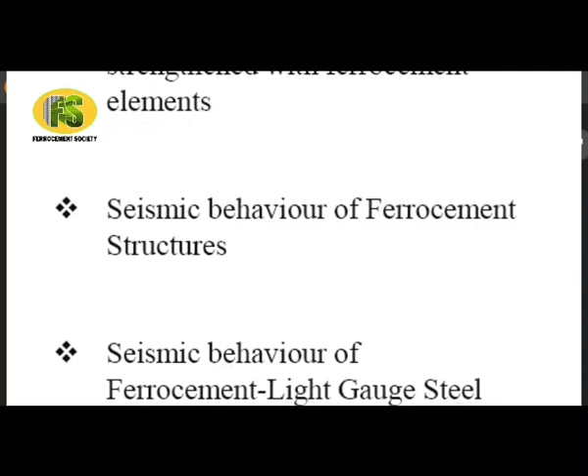Today I will talk about ferrocement and the seismic performance of structures with ferrocement elements. I will cover three aspects: seismic behavior of structures strengthened with ferrocement elements, seismic behavior of ferrocement structures, and seismic behavior of ferrocement and light gauge steel composites.

The first and third points may seem similar, but they are not. In the first point, we talk about elements that add strength, stiffness, and maybe ductility to an existing structure. In the last point, ferrocement and light gauge steel composites share equal responsibility for carrying the load, even at the working stress level and under static load.

When we study the dynamic behavior of any structure, what properties are we interested in beyond those required in statics? In statics, we mainly require stiffness and its degradation over strain level. In dynamics, the problem is more complex because we must look at mass distribution, the amount of mass the structure has, and its structural damping. These three properties are important for elastic analysis.

When we venture into the plasticity or near-failure region, we must also take into account stiffness degradation and hysteretic damping in addition to structural damping. All the studies we will discuss focus on evaluating these parameters for structures involving ferrocement.

We know that ferrocement and reinforced concrete structures behave differently under impact loading. A ferrocement structure would have widespread, closely-spaced cracks because of closely spaced reinforcements of smaller diameters, and the structure would remain intact even after a significant impact. The RCC structure, with reinforcement placed far apart, typically fails by crumbling, delamination, or more brittle failure. So ferrocement inherently has more ductility than RCC structures, which is advantageous for seismic behavior.

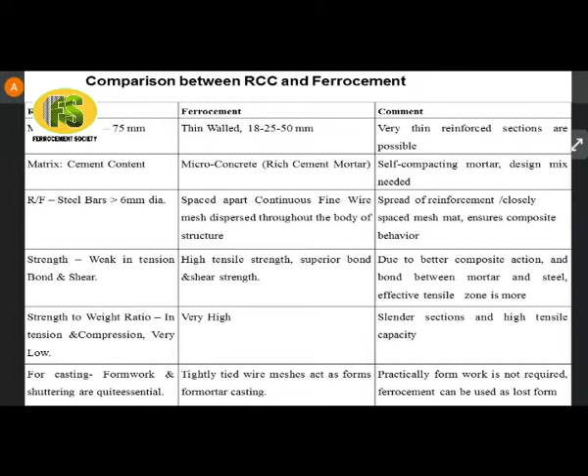Now we begin with the first part of the topic: seismic behavior of structures strengthened with ferrocement elements. I am referring to a research case study taking the example of a typical masonry building.

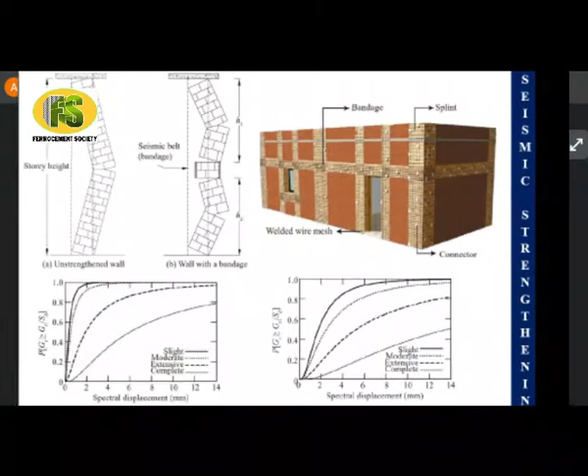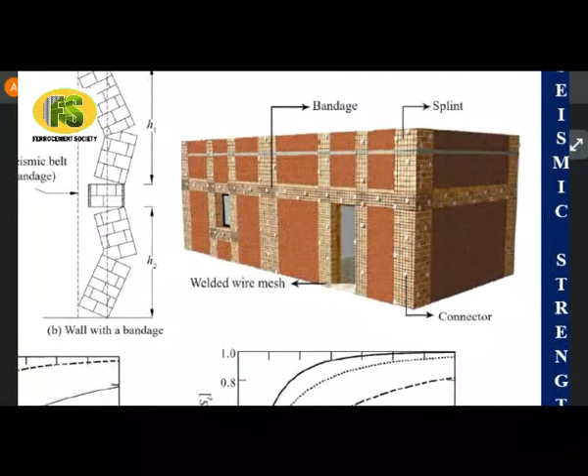An unreinforced masonry building has very poor performance during an earthquake. This poor performance is mainly due to the out-of-plane rocking behavior of cross walls, or walls normal to the direction of earthquake, where the span of rocking becomes the entire story height, as shown in figure A.

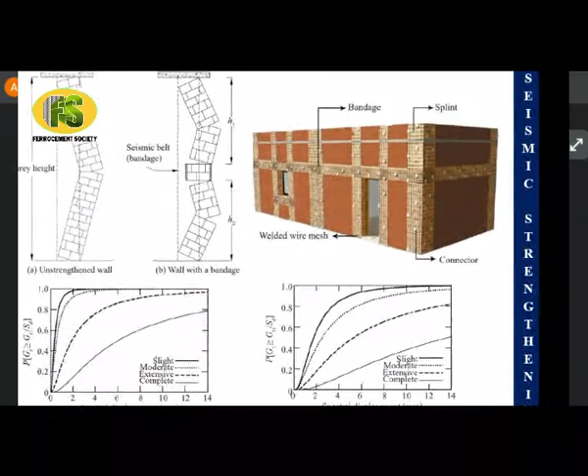In the literature, ferrocement bandage and splint elements have been provided in two ways. In either way, the mesh is provided on both sides of the masonry wall and connected through shear connectors by drilling holes at regular intervals along the length of the bandages and splints.

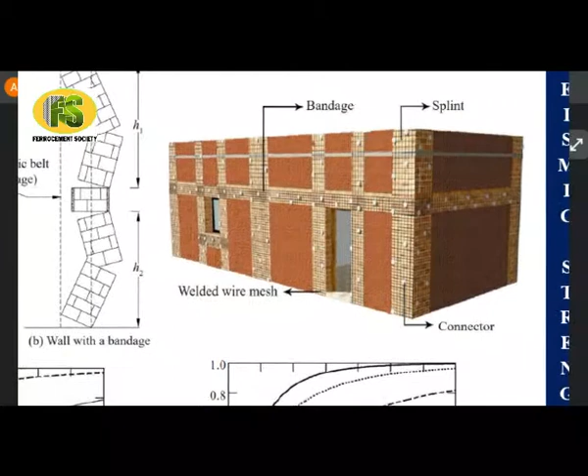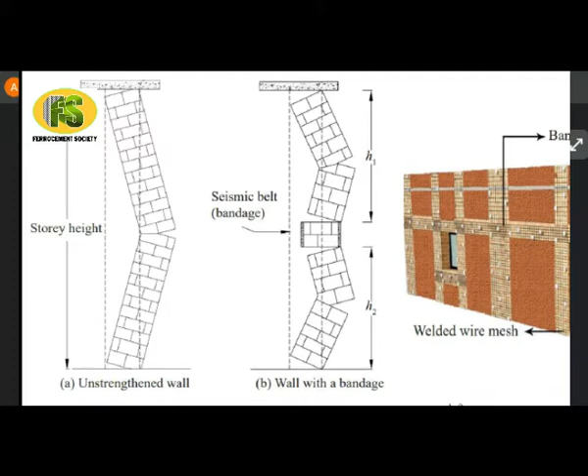Now with this, what happens is the rocking behavior changes. Instead of the story height becoming the span for rocking, the span becomes divided into H1 and H2 as shown in figure B, and that significantly improves the seismic performance of cross walls, that is walls perpendicular to the earthquake plane.

Now the same research shows fragility curves for masonry buildings which are unreinforced, and for those which have this bandage and splint arrangement using ferrocement elements. The left hand side curve is the one for unreinforced masonry without bandage and splint.

As we can see on the x-axis, there is spectral displacement, which is the intensity parameter for the earthquake. As the earthquake intensity increases, the spectral displacement increases. On the y-axis, probability of exceeding a particular damage state has been plotted. There are 4 damage states: slight damage, moderate damage, extensive, and complete collapse.

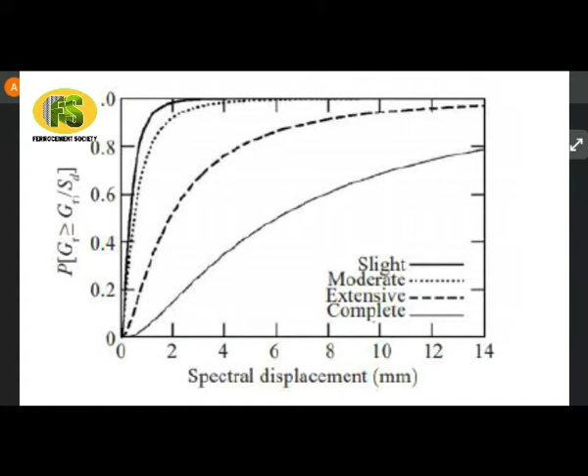So the probability of exceedance of slight damage at spectral displacement, let us say 2, we can observe it here to be close to 1.0. Whereas if we look at the right hand side curve, for the same spectral intensity and the same damage state, it is well below 1.0.

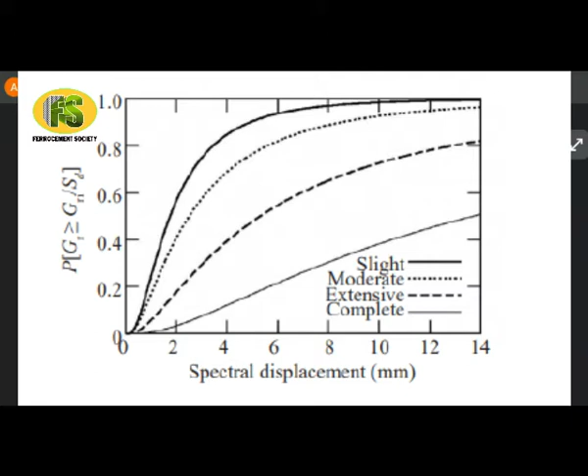That means the entire curve is shifted towards the right, indicating that the seismic behavior of the building has phenomenally improved. So this is one of the successful methodologies of strengthening masonry using ferrocement.

I will quote another study where infilled RC walls have been strengthened at particular locations using masonry with ferrocement paneling. For example, you can see infilled masonry here.

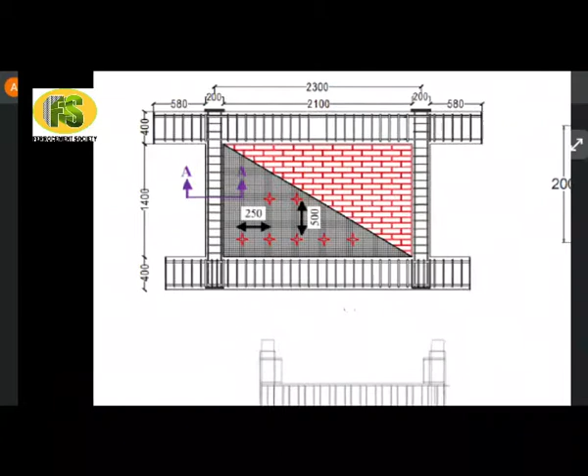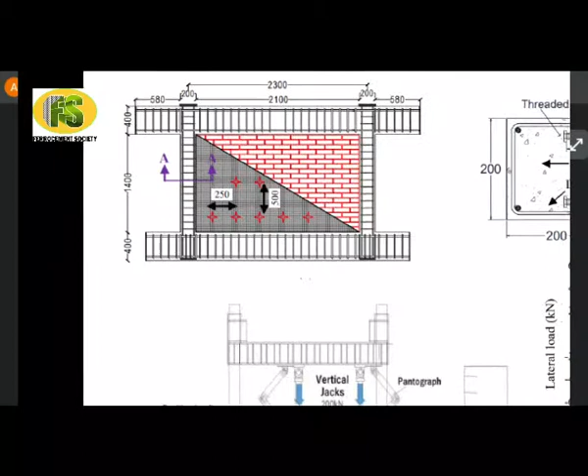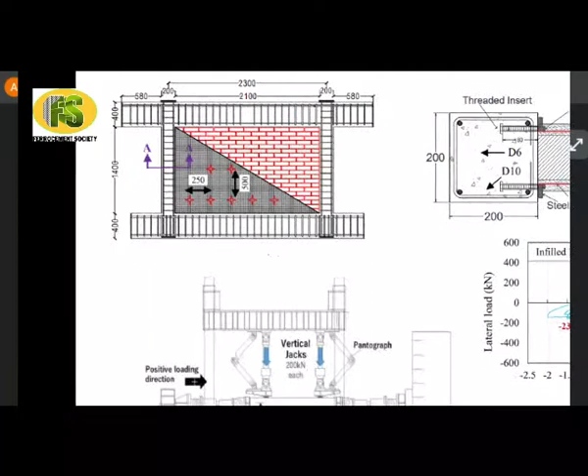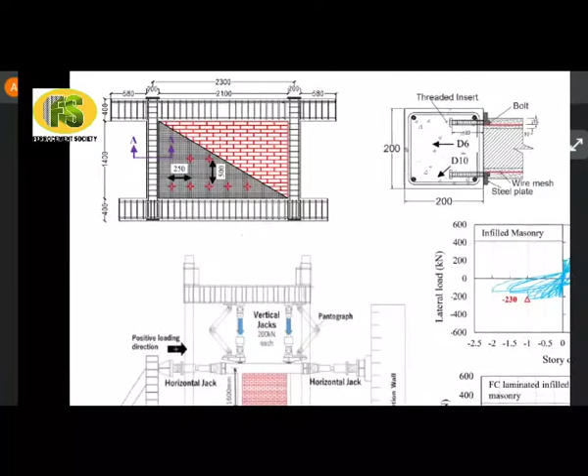This reinforcement mesh is tied to these screws at regular intervals, and these screws are embedded inside the column. So there is connectivity between the ferrocement mesh and column, and connectivity between the ferrocement panel and the masonry.

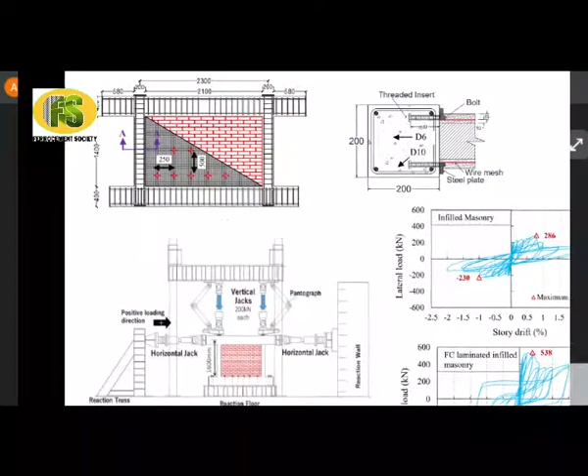Such an arrangement has been tested for a given gravitational load. Let us say we are considering a wall of a 2-story building. Then we compute the gravity load coming on the first floor level, and that is applied by vertical jacks shown here. 200 kilonewton is applied in this case.

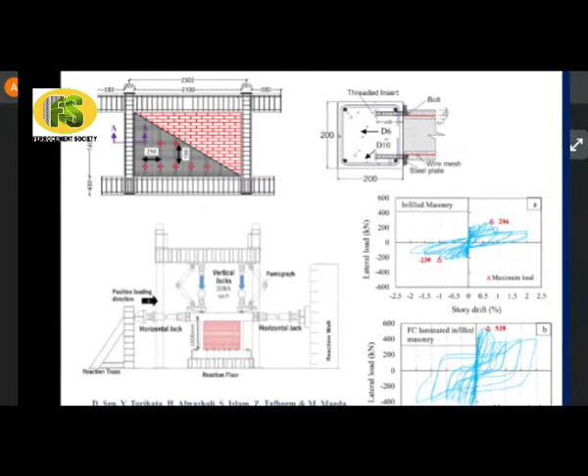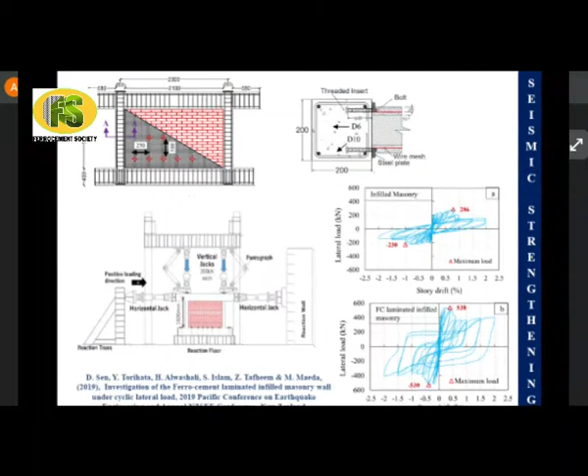And then you have horizontal hydraulic actuators. These actuators push the masonry in either direction, so we obtain a reversal of displacement, similar to an earthquake but in the static sense. So what we get is this lateral load versus story drift hysteretic behavior.

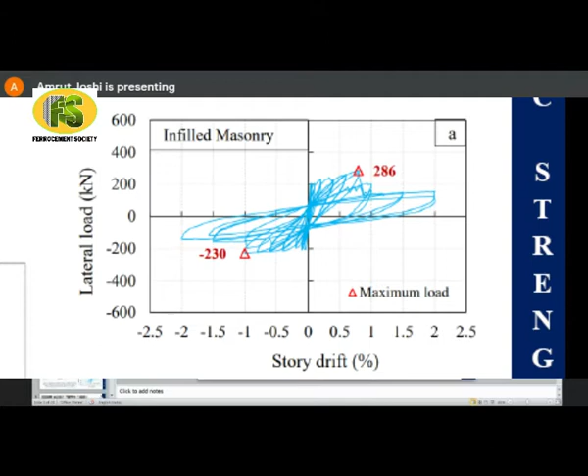There are 2 plots plotted here. The one above is infilled masonry without ferrocement jacketing, and then we have the infilled masonry with FC lamination. As can be clearly seen, not only has the strength significantly improved.

Always increasing the strength may not be appropriate in earthquake design, but the more interesting fact is, if you look at maximum displacement, the area under this hysteresis loop has increased. This area talks about the energy dissipation capacity of the element.

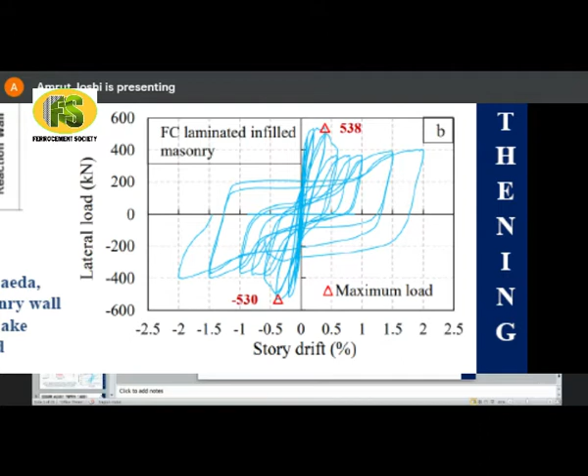So by providing this, the strength and stiffness have, no doubt, increased, but it has also increased the energy dissipation capacity, which gives favorable behavior under earthquake.

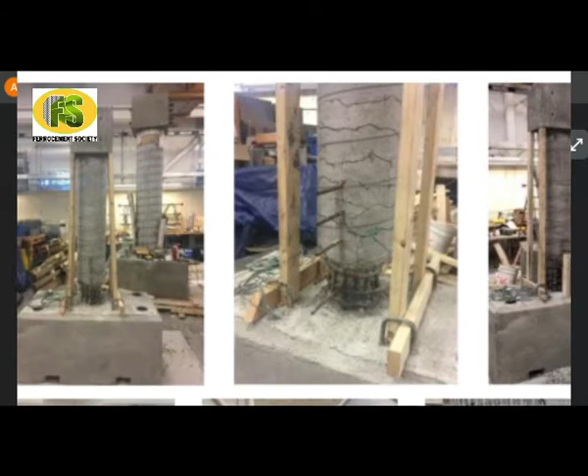Now I'm moving towards the last study in this segment, and that is a doctoral thesis from the University of British Columbia. It is very recent, from 2020.

So what is done in this thesis is, there are two bridge piers in Canada. The thesis says that in Canada most bridges have reached their design life, and they need serious attention as far as their deterioration is concerned. So in this study, two bridge piers are taken.

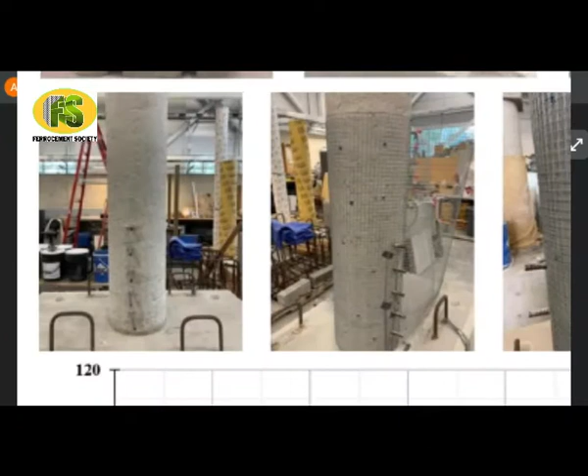The bridge pier on the back side is the shear deficient bridge pier, whereas the bridge pier on the front side is seismically damaged. This seismically damaged and shear deficient bridge pier has been strengthened by providing ferrocement jacketing up to a certain height, as seen in this figure.

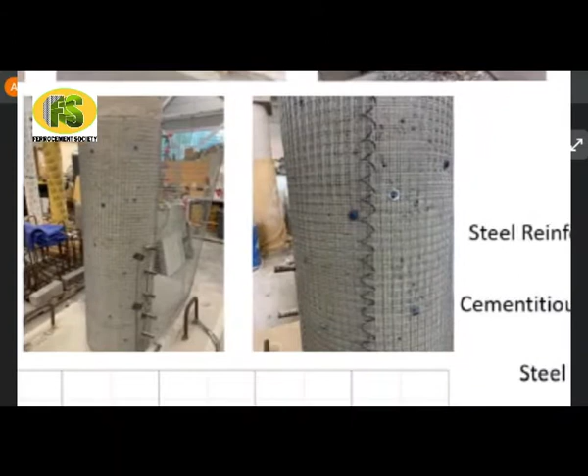We can see the ferrocement mesh here, and this is a schematic of this scheme. This is a very interesting study where the damaged and shear deficient column bridge pier has been repaired and strengthened with the help of ferrocement jacketing.

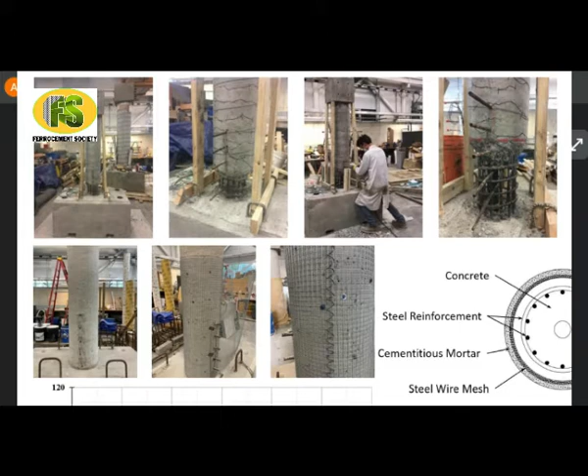There is some slight stiffness degradation remaining even after ferrocement jacketing for some range of moment. But the interesting fact to observe is that ductility has tremendously increased, and this added ductility is going to enhance the performance of this bridge under the event of an earthquake.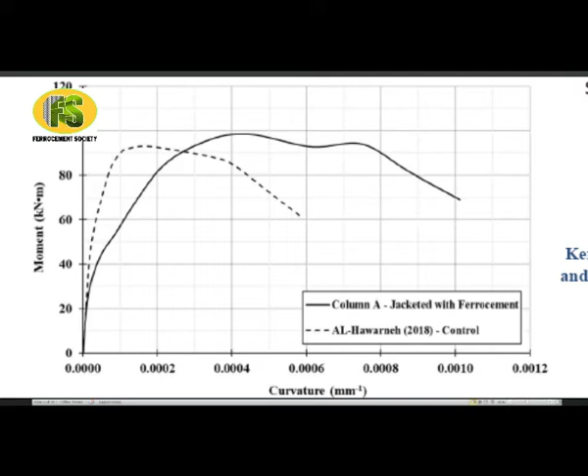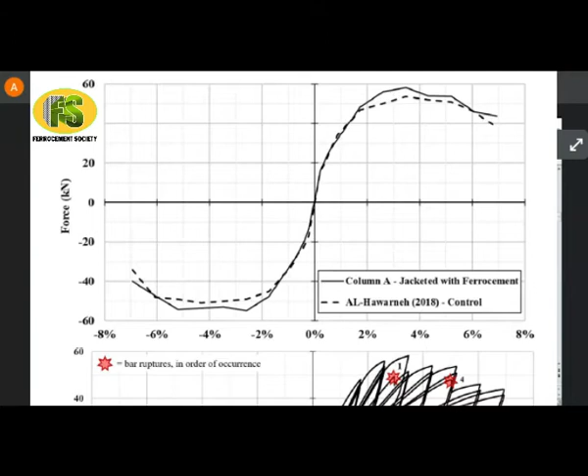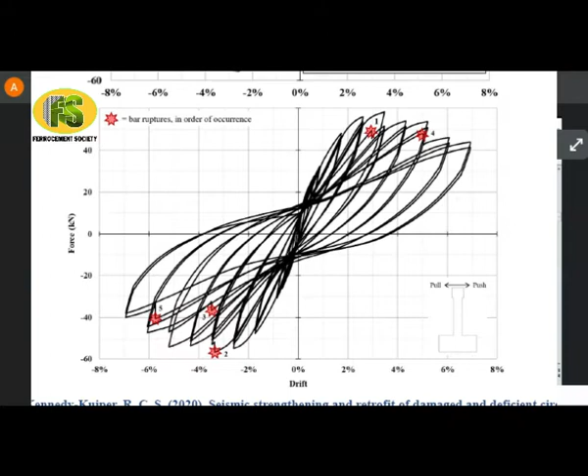For the same column, this is the force versus deformation curve of the virgin column in dotted line and jacketed with ferrocement in thick line. Below is the hysteretic behavior of the column. We can see nice broadening hysteresis loops, indicating that the energy dissipation capacity and hysteretic damping increase as the damage propagates, which is a very good indication for better seismic performance.

Now I am coming to the second segment of this talk, which is studying the seismic behavior, or studying the properties required for enhancing the seismic behavior of ferrocement structures themselves. So these are not used as strengthening, but these are structures in themselves.

For example, this is a precast ferrocement wall, and it has been tested with a reaction wall, reaction frame, and strong floor facility for a lateral load which is cyclic in nature, so there is reversal of the load occurring. And what are the results?

The result obtained for this panel—we can also have a look at the dimension of the test specimen. It is 2400 mm, that means around 2.4 meters, center to center distance between the base and top capping.

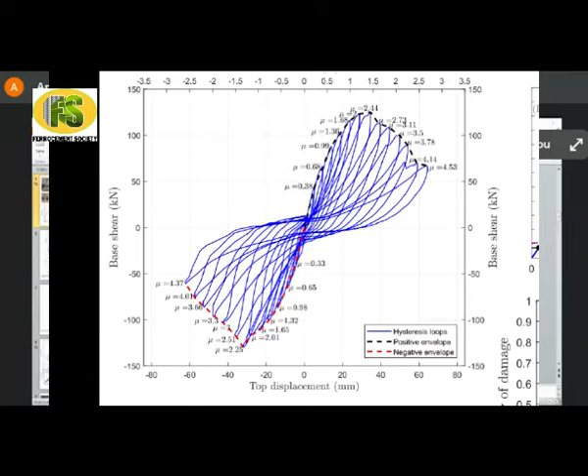Now from this behavior, what has been done here? There are two things that we get here. One is the backbone curve, shown in black dotted line and red dotted line on the to and fro sides. We also get how the area under the hysteretic curve goes on increasing as the displacement increases. We have a simplified model parameter calibration based on this.

Using that simplified calibrated model, we can now go for the numerical modeling of a two-story wall, which mimics a two-story building. It can be subjected to various earthquakes, and then we can do an incremental dynamic analysis. What I mean by incremental dynamic analysis is, let's say peak ground acceleration is our intensity measure of the earthquake.

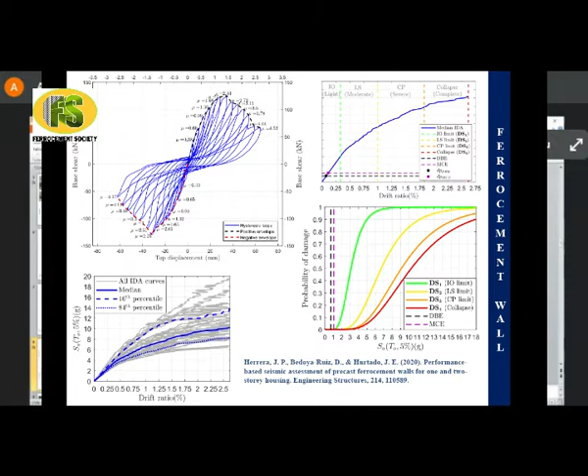So I will collect, let's say, the Bhuj earthquake time history. Its PGA may be something, but I will now make it 0.1 times g, and then I will go on increasing it successively. So I will go on scaling this time history to arrive at peak ground accelerations of 0.1g, 0.2g, 0.3g, 0.4g, until the structure or the numerical model says that the structure has failed.

Such kind of analysis will give me something called an IDA curve. This IDA curve is shown at the bottom left corner. What does this IDA curve give? It gives you the drift ratio on the x-axis, and on the y-axis it is the intensity parameter of the earthquake.

In this particular case, they have not adopted PGA as an intensity parameter. Instead, they have adopted the spectral acceleration of the first mode as the parameter. We can see that as this drift ratio goes on increasing, the curve goes on becoming flatter and flatter. So it is something similar—IDA is something similar to static pushover analysis, but in a dynamic sense.

Now, for various earthquakes, this exercise has been done, and then 16th percentile and 84th percentile curves are plotted in dotted blue lines here, whereas the median curve is plotted in the thick blue line.

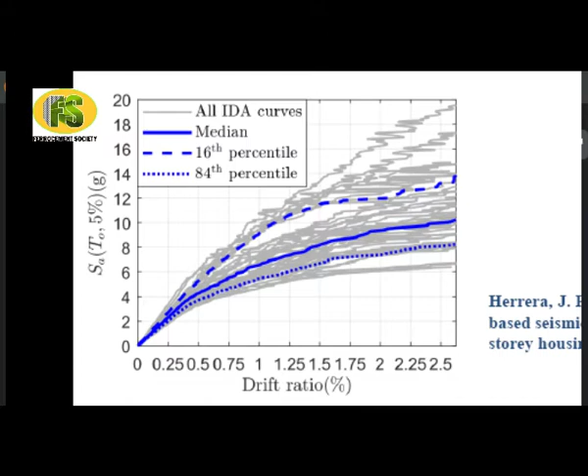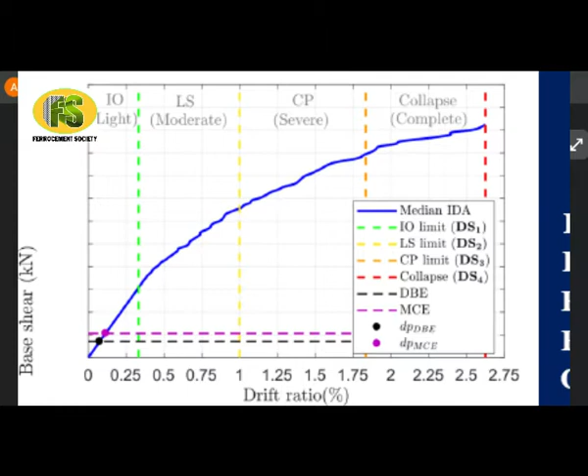This median curve, I have taken it on the right hand side top. Looking at the characteristics of this curve and damage accumulation in the model, we can find out the drift ratios corresponding to various damage states, such as immediate occupancy, life safety, collapse prevention, and complete collapse. Based on these damage states, a fragility curve can be plotted.

So that typical fragility curve is plotted below. For example, on the x-axis we have earthquake intensity. It may as well be peak ground acceleration, but in this case it is spectral acceleration. And on the y-axis, we express the probability of exceedance of a particular damage state.

If you clearly observe here, for design basis earthquake and maximum considered earthquake, the earthquake intensity parameter is around 1 SA, around 1 meter per second, 1 G. So it is 1 into 9.81 meter per second square. And if you look at all the curves, green, yellow, orange, and red, none of the curves has shot beyond 0 till this limit.

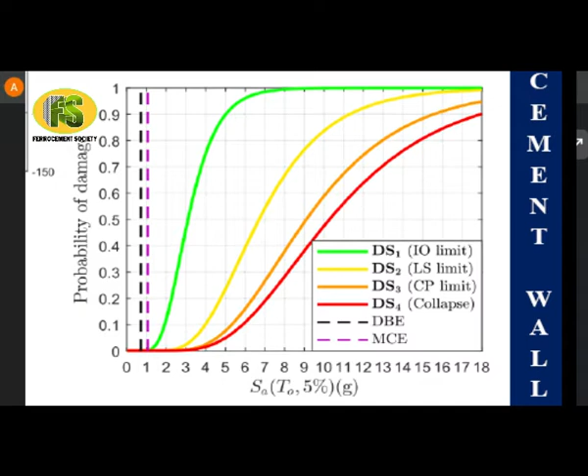What does it mean? It means till the design basis earthquake and maximum considered earthquake is reached, the probability of exceedance of any of the damage states, even immediate occupancy damage state, is 0. That indicates a phenomenal seismic performance of the model.

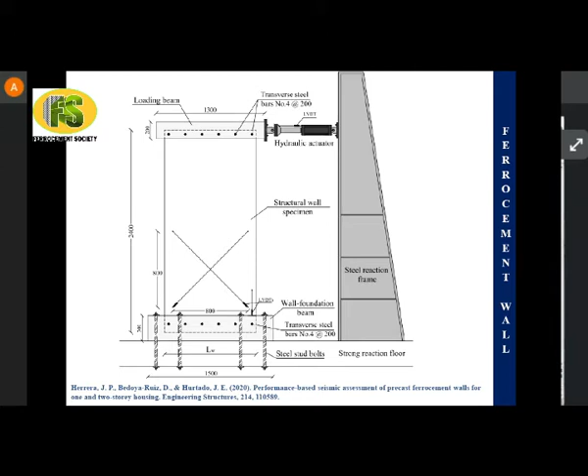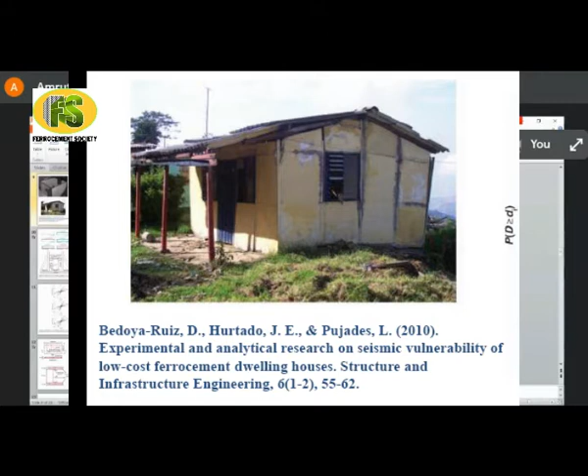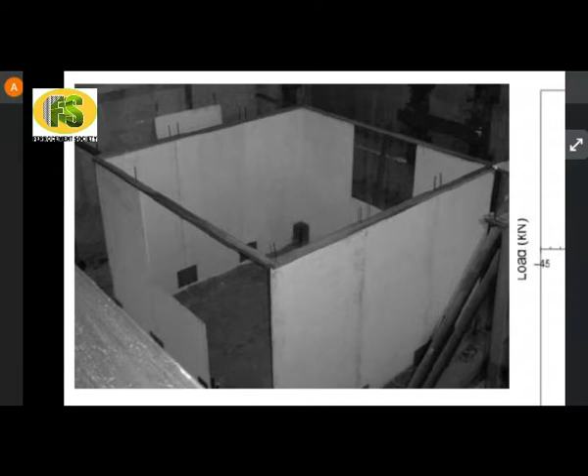This is another example where the ferrocement dwelling has been constructed on the shake table, and you can see that the roof is light or flexible roof. Therefore, the roof is not modeled here on the shake table; it is not cast on the top. This is because it is a typical case of housing where the roof is either flexible or light, so it doesn't affect the overall behavior of the structure. So that has not been modeled.

On this shake table, this model is subjected to various time histories of earthquakes with increasing PGA, and the graph here gives you the probability of exceedance of a particular damage state.

We can see up to a PGA of around 0.4 G, the probability of exceeding or reaching collapse is marginal. So this gives us the idea that this ferrocement house with a light roof is performing not very well, but averagely okay. Up to 0.4 G, it is not reaching collapse; it is reaching moderate damage. That's okay, but life is saved. Therefore, this ferrocement housing dwelling is performing averagely in the event of an earthquake.

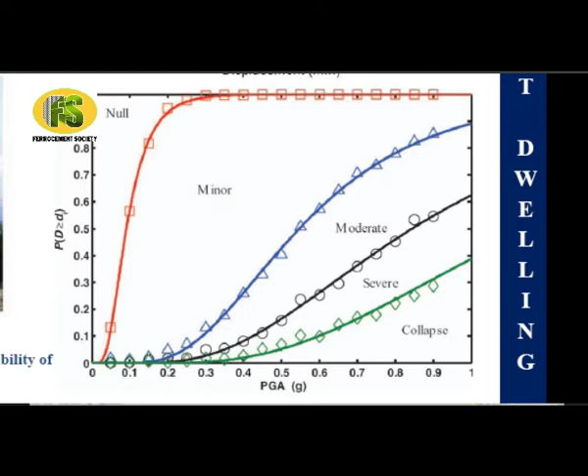However, we can improve its performance by looking at another interesting study. I am now going to quote another study that doesn't involve ferrocement, but has given us the idea to incorporate ferrocement into it.

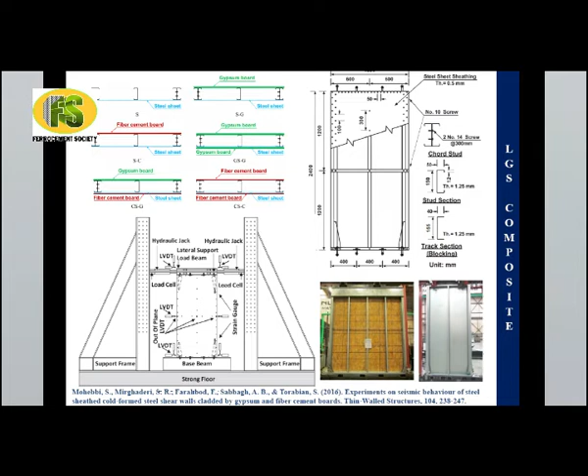This study, on the top left-hand corner, shows light gauge steel sections with cladding of various materials. We have a cladding of steel sheet only on one side. In another case, we have a steel sheet on one side and gypsum board on another side. Then we have fiber cement board on one side and steel sheet on the other side.

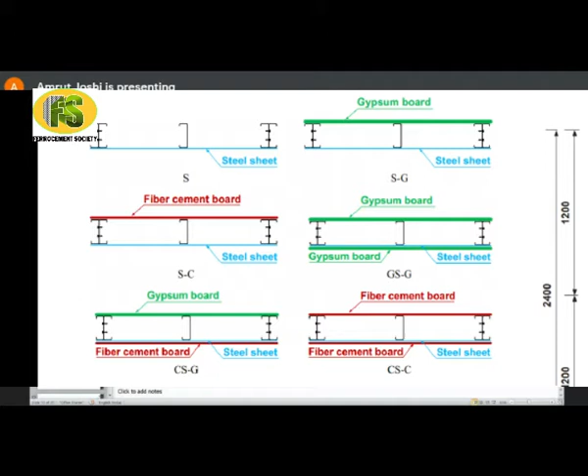So how does this wall typically look? It is shown on the bottom right corner figure. We have LGS framing members which are cladded with various claddings such as wood, steel, gypsum board, fiber cement board, and so on and so forth.

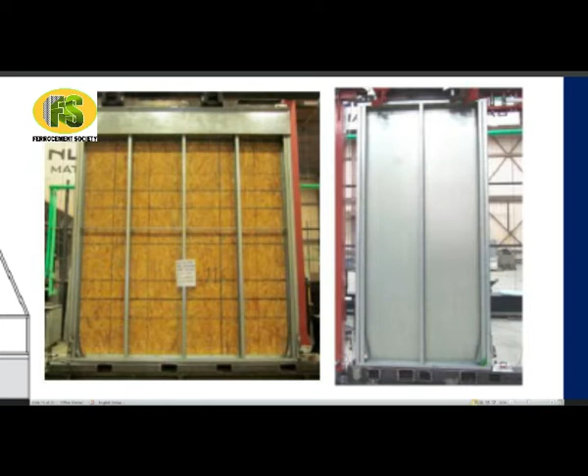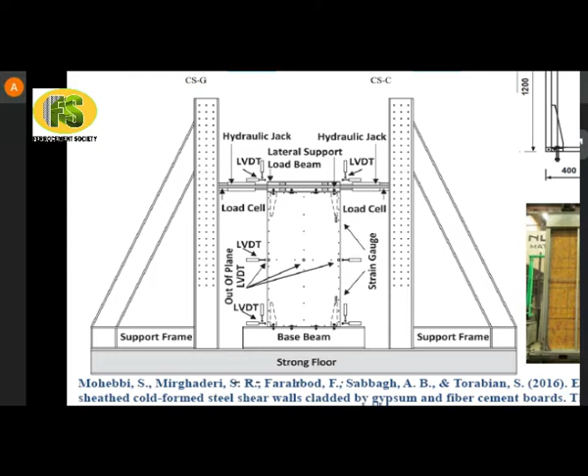For all these combinations of cladding materials, this test, shown schematically on the left hand bottom, has been performed. These walls have been fixed at base, and at the top we are applying to and fro displacements. So we are essentially characterizing the cyclic behavior of these walls under cyclic loading. Of course it is static loading, but it gives us many parameters to model its seismic response.

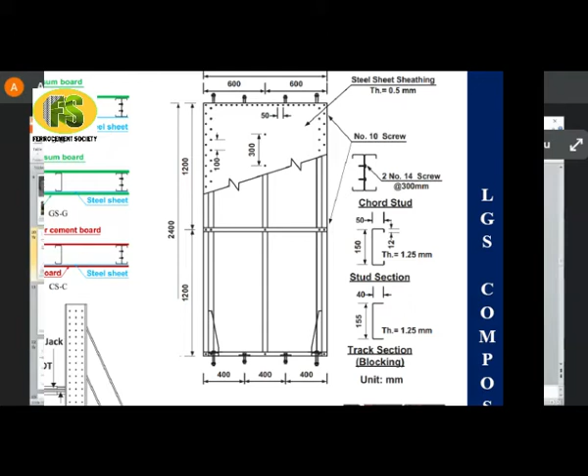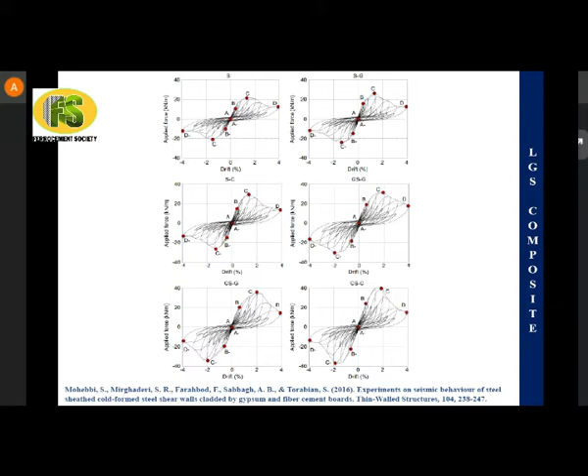This gave us an idea: why not have ferrocement panels as cladding members. This is not my idea, obviously; it has been proposed by Dr. Arun Purandare. So I will just explain the schematic. What we have done is use a ferrocement panel of typical dimension 900 by 600 mm.

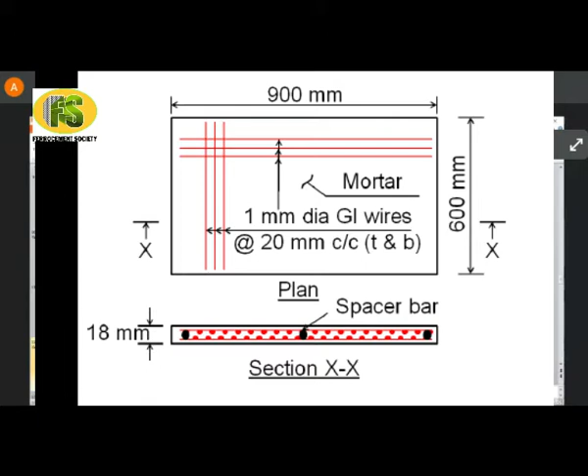So we have 900 mm by 600 mm by 18 mm thick panels with 2 layers of wire mesh reinforcement. The mesh is of 1 mm diameter GI wires, placed at 20 mm center to center distance, in both directions at top and bottom, with a cover of about 2.5 to 3 mm, depending upon the diameter of the spacer bar.

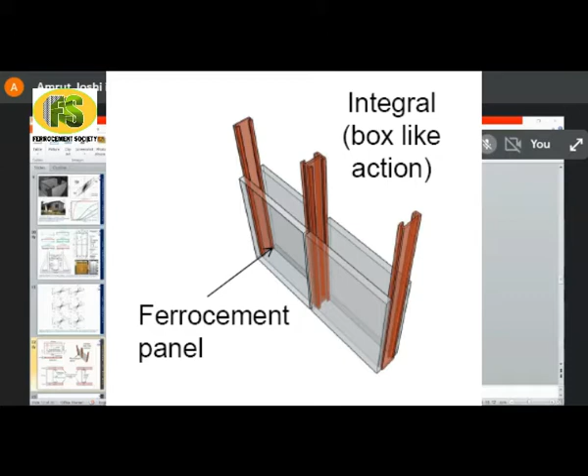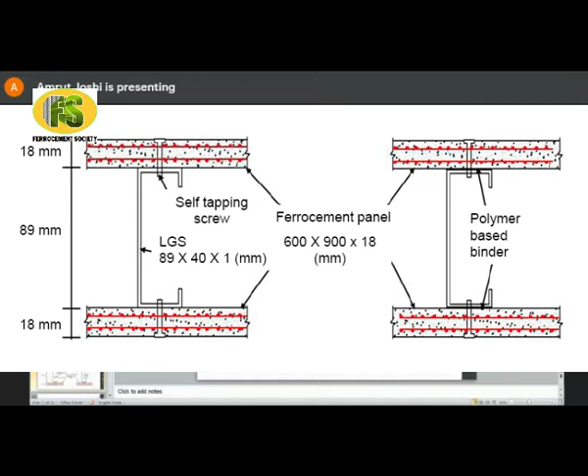These ferrocement panels have been attached or pasted using self-tapping screws, shown in the bottom left corner figure. These screws fix the ferrocement panels on either side of light gauge columns. These columns can be C sections with lips connected back to back, or even box sections. The ferrocement panels are connected from either side through these self-tapping screws. This arrangement typically looks like this.

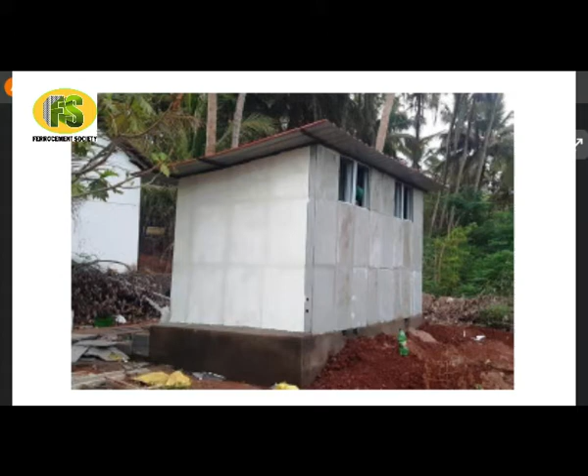All these structures have been designed and supervised by Dr. Arun Purandare. We have light gauge steel framing members here, and on top of that, the ferrocement panels have been fastened using self-tapping screws at regular intervals. Typically, what we have used is 150 mm center to center distance.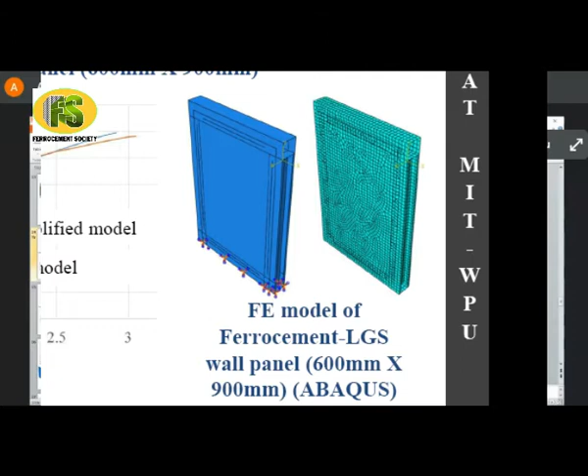These ferrocement panels have been connected to the light gauge steel sections through shear connectors in Abaqus. So the entire thing is modeled discretely. The ferrocement panel has been modeled separately. The reinforcement within the ferrocement panel has been modeled through a smeared layer approach. Then the screw is modeled separately, and the light gauge steel tubes are modeled separately.

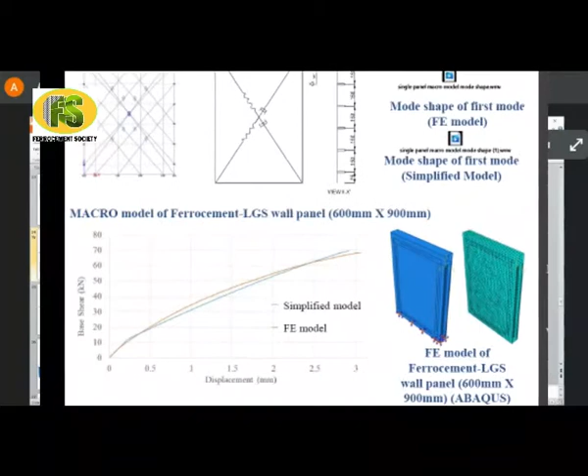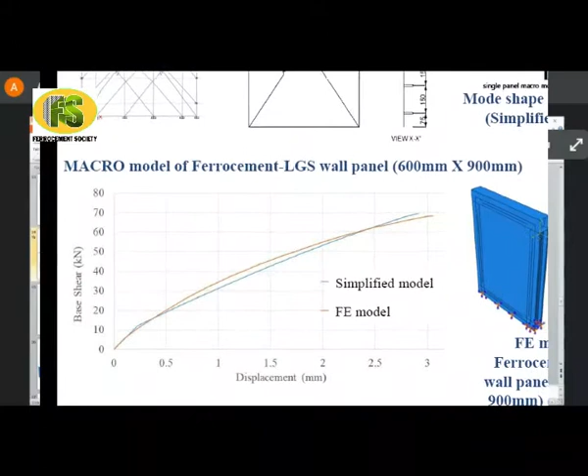For this model, the pushover analysis has been done. That means at the top, we go on applying a displacement till failure occurs, and what we measure is the base shear, the base reaction. So we can draw a graph of base shear on the y-axis and the displacement at top on the x-axis.

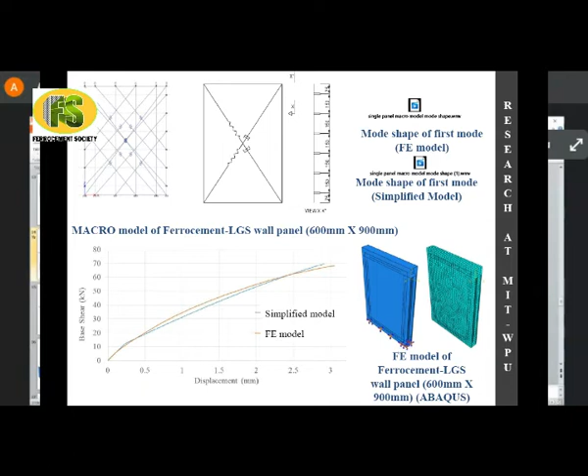However, this model is computationally very costly, it takes a hell lot of time. So therefore, there is a need to propose a simplified model. Corresponding to this, a simplified model is proposed, shown on the top left-hand side corner.

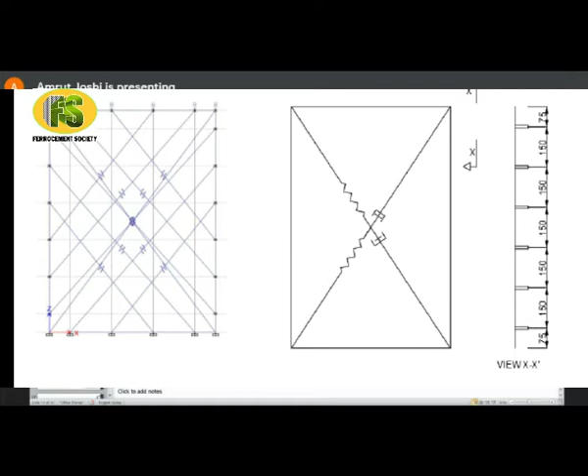It involves springs and dampers, and I have superimposed the results of the simplified model and the FE model over one another. Not only does it predict the strength in agreement, it also predicts the ultimate displacement in fair agreement. So we can say this macro model, or simplified model, works well, and it works within no time. It takes hardly any time to run the simulation of pushover analysis.

Now, this is as far as the static comparison is concerned. But now, what about dynamics? Are these two models equal when it comes to dynamic performance?

As an indicator, you can see the first mode of this finite element model is an in-plane sway mode, and its frequency is somewhere close to, let's say, 200 Hertz. This is the sway mode that I have obtained with the simplified model, with frequency within 10% agreement.

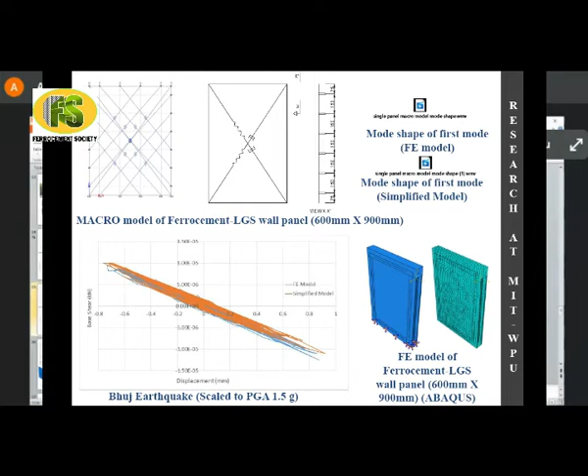Also, if I subject this model to a base acceleration time history, I am going to get a hysteretic behavior. That hysteretic behavior, through the detailed finite element model and the simplified model, is superimposed on one another, for a Bhuj earthquake time history scaled to a PGA of 1.5 G. With this, I am quite sure that the simplified model is going to work well.

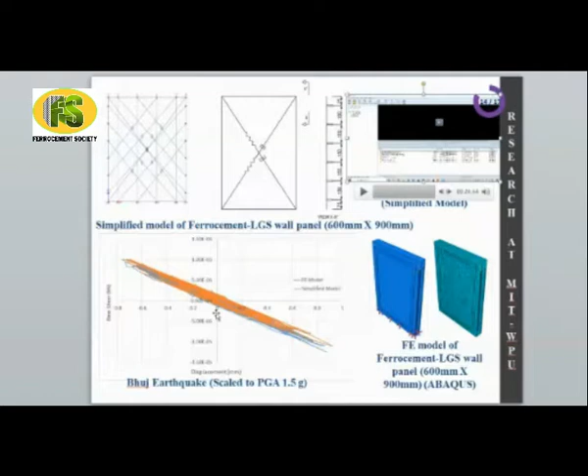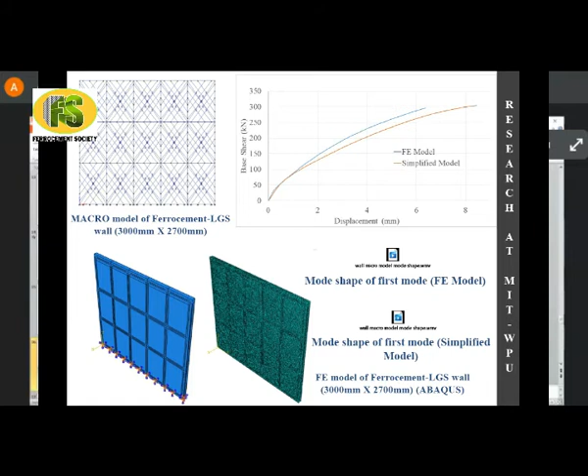Now, it is not merely enough to model a single panel isolatedly in a wall. Instead, the entire wall has now been modeled in Abaqus, and also modeled using the simplified model. The curve shows the comparison of pushover results, and this animation shows us the first mode of vibration of both the structures.

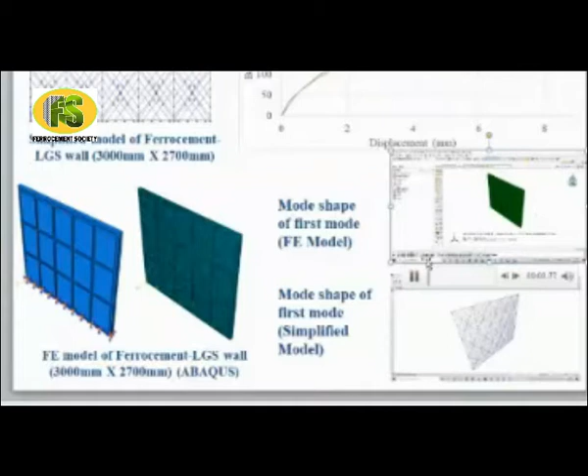And the natural frequency is in agreement. So with this confidence in mind, what we have done at MIT is we have subjected this full scale one story model without opening, with opening, then two story full scale model with and without openings to several earthquake excitations. From these earthquake excitations, we get the incremental dynamic analysis curve, which is PGA versus maximum drift ratio for various earthquakes.

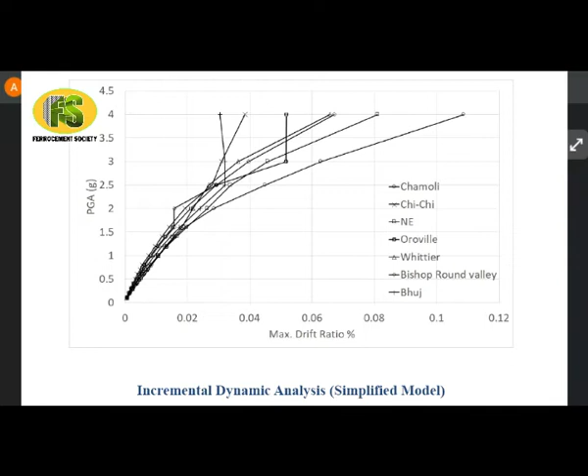Next step is to develop the fragility curves, where we can specify at what level of PGA or intensity parameter does the failure occur, given a particular arrangement of ferrocement and LGS. This is next in line, and citing the pandemic, we could not do its experimental simulation, but that's pending. Once pandemic restrictions ease, we can do the experimental validation. This is the direction in which we are proceeding at MIT WPU.

Now I would like to state the summary and direction of future research. As I said, ferrocement structures are lightweight, and that's the biggest advantage as far as seismicity is concerned, because lesser the mass, lesser is the seismic or inertial force attracted. Ferrocement LGS construction is very fast and sustainable, as we save on steel and cement. Enormous quantity of cement and steel will be saved. Only worry is connection behavior.

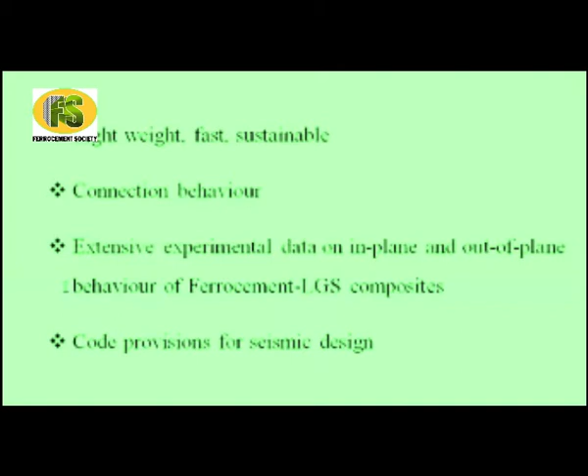To validate the connection behavior analytically and experimentally, we need to perform extensive experimental research on in-plane and out-of-plane behavior of ferrocement LGS composites. And this should all come in the format of a code, because right now, in the absence of code provisions, it is very difficult to accept this as an alternative technique of construction. With this, closing remarks and summary, I thank all of you.

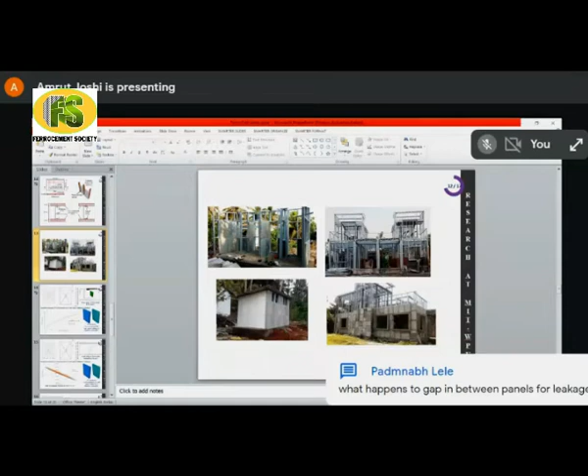Mr. Milan Kulkarni, please. First and foremost, let me congratulate Amrut Joshi on great work done at the academic level, especially the hysteresis loop, which talks about the great amount of strain energy below the stress strain curve of a ferrocement specimen.

The stress strain curve for concrete is completely different - you have very little strain energy compared to ferrocement. Having said that, we who are working in the field, designing structures, building them and signing off as the structural stability - what we have done in my office is modeled it simply as ribbed shear walls with hollow square columns and regular 200 by 450 beams, pure ferrocement beams. There is no - the beam is designed as ferrocement sections, and the shear walls have cutouts for the doors and windows. Simple arrangement, and they are ribbed basically so that there is stiffness to the entire model.

And for very difficult problems, we did the analysis by Tekla modeling, STAAD modeling, and ETABS. We did the seismic response method, the response spectrum method and the seismic coefficient method. We calculated the base shears. The base shears were coming very, very low - so the earthquake forces, I'm going the other way around, please, in the real sense.

We modeled a real building, and we found that we put the shear walls itself with cutouts, and we had stiffeners, horizontal and vertical, and the slab was also a grid slab, defined as a horizontal diaphragm - that also gave us advantage because of the huge stiffness. Generally, when the analysis were made, we got the forces - tensile, bending compression, direct compression - and then we designed the worst of the elements using the empirical formulas calculated by Dr. Divekar. We found they were in concurrence with the stresses developed in the section for the worst of live load, dead load, and wind load. This was done in zone 4 with an importance factor of 1.5. This was the most practical solution.